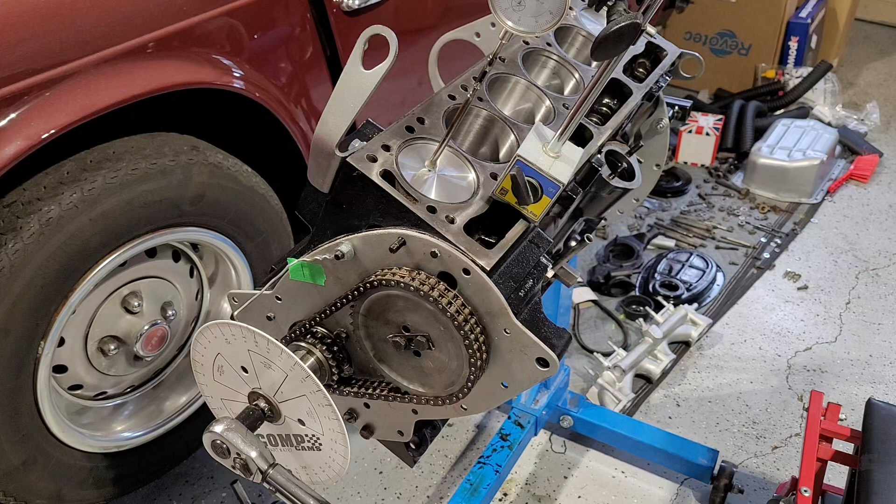Okay, welcome to part 2 of the true top dead center. So in this, what we're going to do is we're going to find a true top dead center. If you haven't watched part 1, I suggest you watch it, and I will explain why the system looks the way it is and the way I do it. So let's get cracking into what it is.

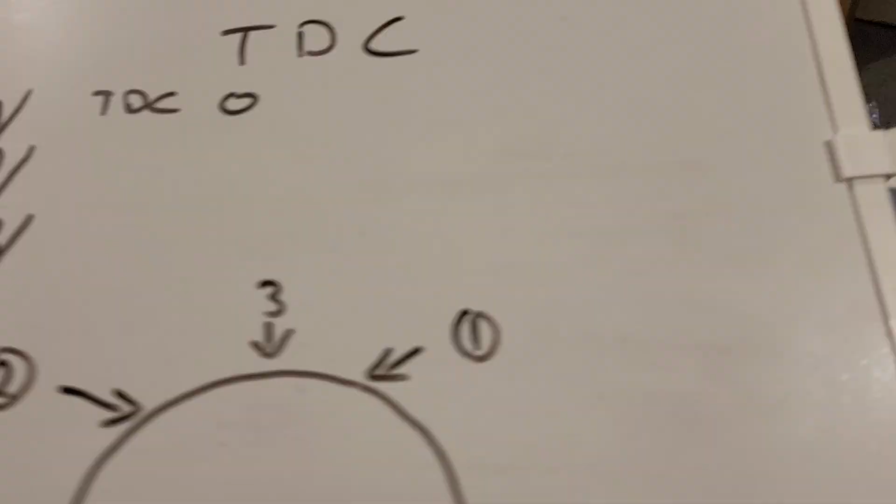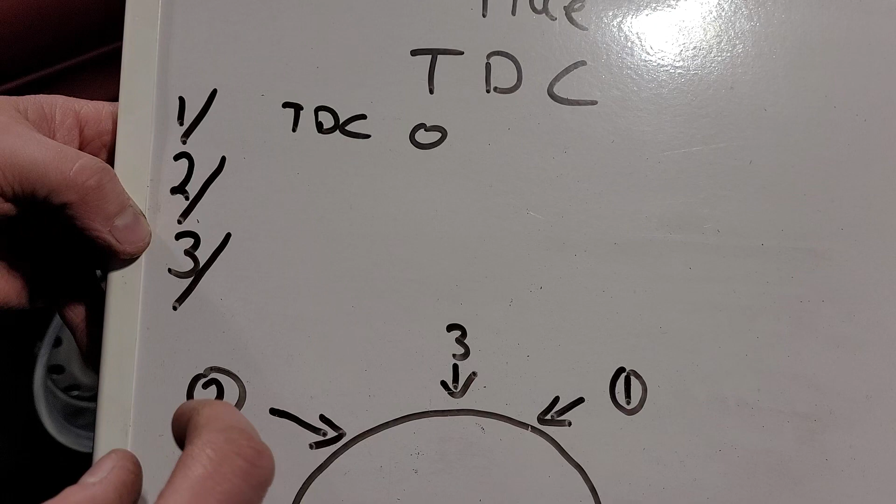So, true top dead center. Most people, they'll take their first reading, they'll write it in, they'll take the second one, they'll add it all together, divide it in half, and that's what gives them the true top dead center. Great. In this case, what I'm going to do is when I take my first reading, I'm going to set it at 0. I'm going to set that actually at top dead center.

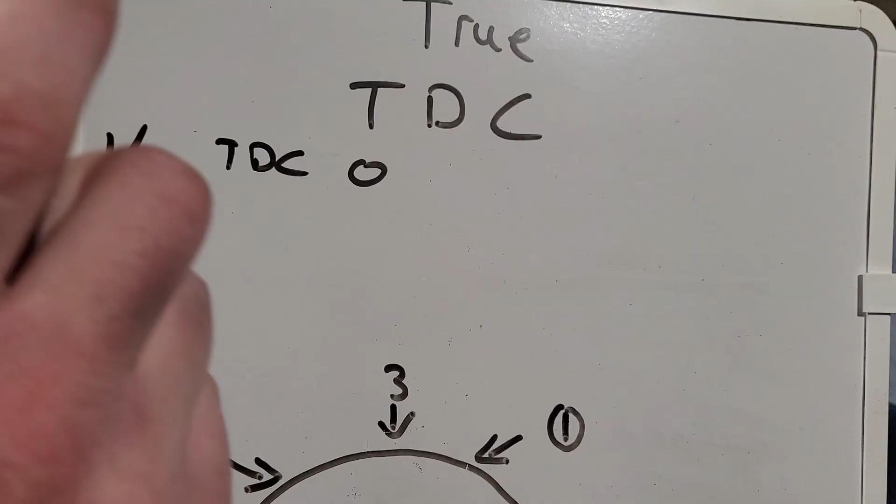That way, when I actually take the second reading, I don't have a big number to worry about. I don't have to worry about adding them together. I should have a small number that should be easy to divide in half, and that would give me the true top dead center. Well, that's the plan.

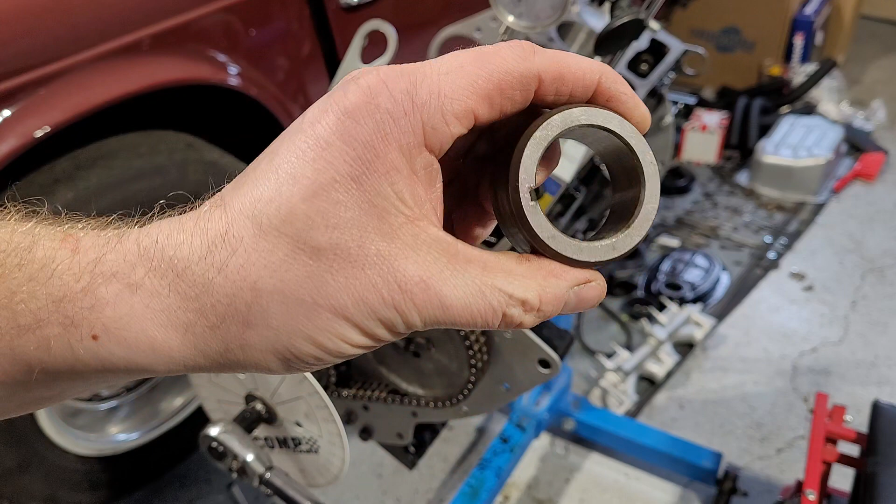Okay, so to do this video, what do I use? In this, I use a simple degree wheel. The only difference is I've used a collar. I've taken an extension for a 1/2 inch drive, and I simply cut it, used 2 washers in the degree wheel and welded it all together. I do have a shim that sticks in, so when I pull the shim out, it allows me to move the wheel, and then I put the shim back in and it holds it tight. So that's basically it. So let's go run some numbers.

As you can see, it's already up in here. You want it as close to the top as you can, but not right at the top. Run up and down a few times, make sure it's clean, make sure there's no assembly lube in there, that it's running smooth. I've already done that. So when it comes up and I start touching off it, I don't want it to go all the way around. I don't need it. I'm going to go roughly about halfway or something. Once I get to about halfway, I'm going to zero it out. So just pick a point. I want it.

Okay, so let me show you this. Again, the whole idea is to try to avoid this discrepancy. Right? So I'm going to say that's on 0. Or it's less than 0, that's for sure. It's so sensitive. Alright, camera back on.

Okay, now I've done that, I'm going to set my degree wheel to top dead center. If you've watched part 1, I've talked about having the line of sight. As you can see, I've put a bit of masking tape. I've simply got a pencil, drawn the line down, and I'm going to line it up with my pointer. That way, no matter what I do, it'll always end up the same. So I'm going to set this at TDC. Is it TDC? Nope. It's not the point though. I just wanted that. It makes it easier to read.

Okay, so just to make sure it's absolutely set on 0, I'm going to go back. I'm going to bring it back up, and this is just me testing it. I'm basically testing that when I get to 0, it stops at TDC. I just want to, before I go through the whole system, oh, I've gone too far. If you've gone too far, bring it down a fair bit and bring it up. I want to make sure this is right first, to make sure we end up with the right number. So before we move on, again, double check each step.

Oh, I've gone too far again. I don't want to be cutting this video. I want to show that this is how it's done, how I do it. That it doesn't work out perfect every single time.

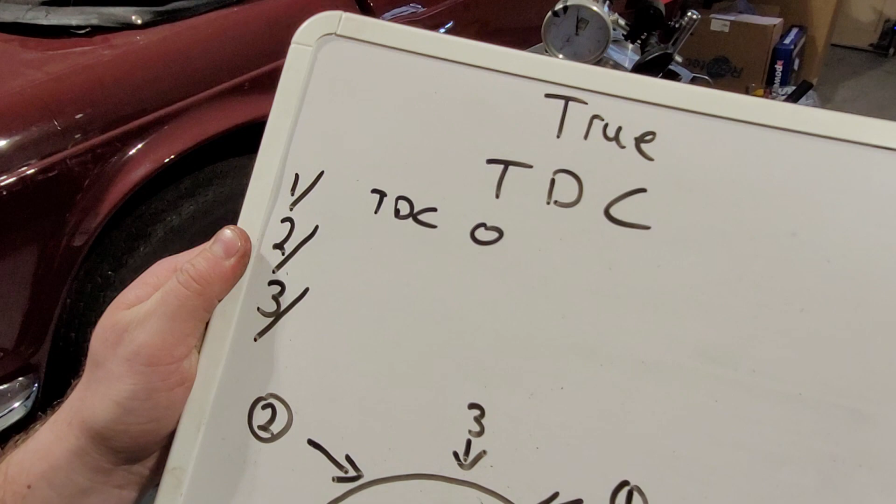And now I'm going to take the second reading. Obviously, it'd be nice to do it in one go. It's not always the case. I can guarantee you'll probably keep doing it a few times. It is what it is. And I'm going to do the exact same here. I'm not going to be cutting it to make it look like a cheat in any way, shape or form. So now I'm approaching it.

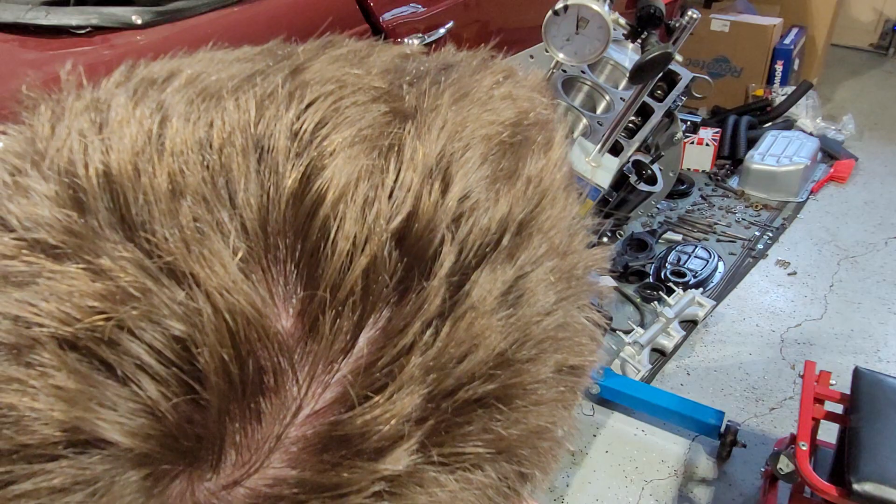So again, now I want to zero it out as best I can. Like I said, the longer bar you have, the easier it is, because I'm using a torque wrench. If you just have a normal breaker bar, it might be a little easier. It's up to you. At the end of the day, whatever you want to use.

Now, I'm going to say that's pretty much as good as the 0 as I can get. I'm going to show you again. All right. So, do you agree that's 0? I would. We're going to get you finer.

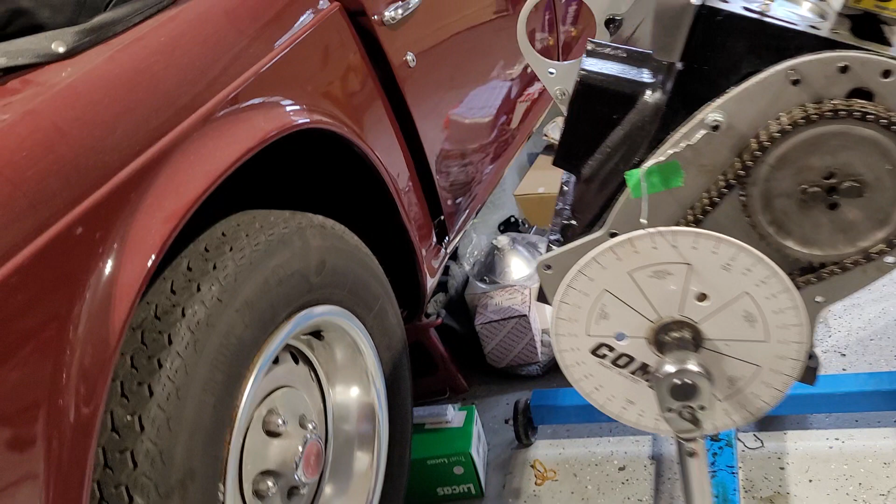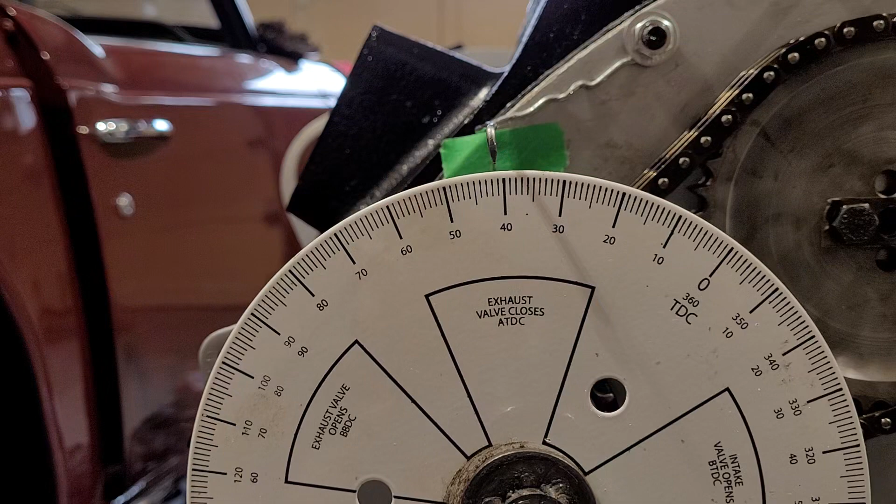Now, what we're going to do is actually, while I'm down here, we're going to look at what we are on. So, if you see where I've lined up the line of sight, you can see that we are on 40. Ooh, what are we? 41 degrees? The camera's moving, but it looks like 41 degrees. 41? How did you end up on 41? That's not right, you should be an even number.

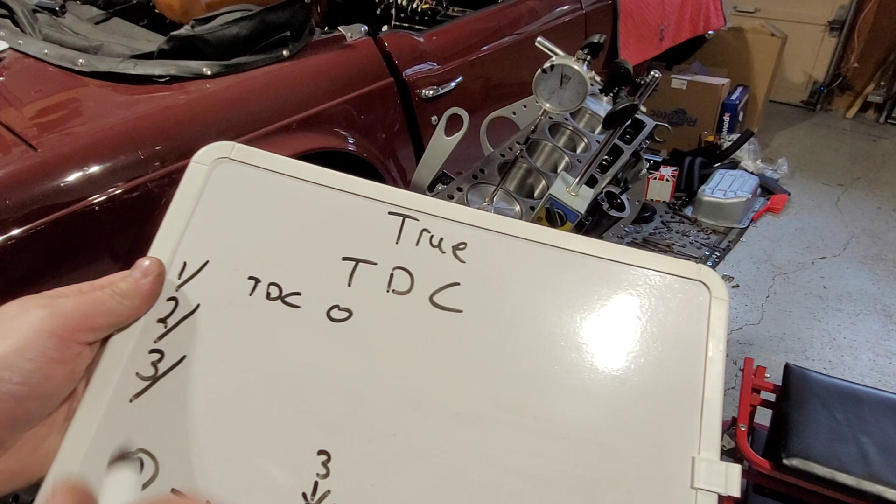So, check. Yeah, we are on 41 degrees. What's the chance of that? Half a degree. God, how do you get half a degree? So, if that's the case, and that's what it's coming up as, we're going to put 41 in. We're going to divide that as 20.5. This is going to be fun. Now, if this works out as bang on 20.5, it's going to be a first.

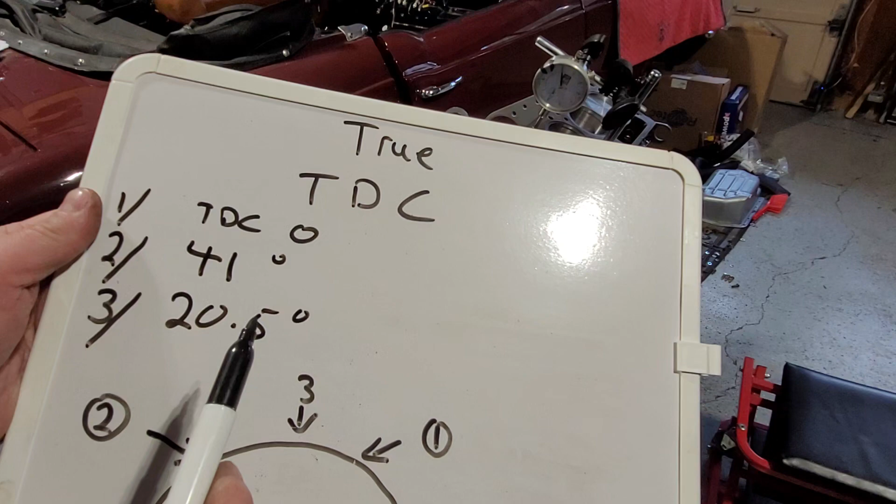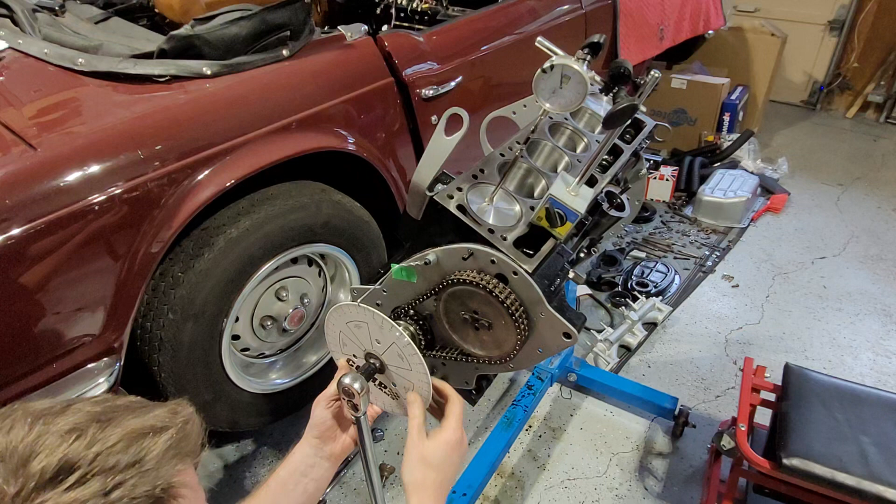Half a degree. God, how do you get half a degree? So, yeah, you're at 41. So, we want to be 20 and a half. So, this is going to be fun. I hope it's 20 and a half. I hope I've got my numbers right. Alright, 20 and a half.

Now, I don't know, something doesn't seem right because it's at 20 and a half, but I know it's zeroed out. I know it was, you see it was 41, so it should be 20 and a half. If not, for some reason it's not, we'll adjust to make sure it is even both sides. But let's see how this works out when I zero it out again. This is going to be fun.

I think the point is to find the exact same number. In this case, it's a half a degree. So let's hope I get exactly on the 0 again, because if it's not, I could change it. But that's the fun in trying to get this. Okay. That's it. There we go.

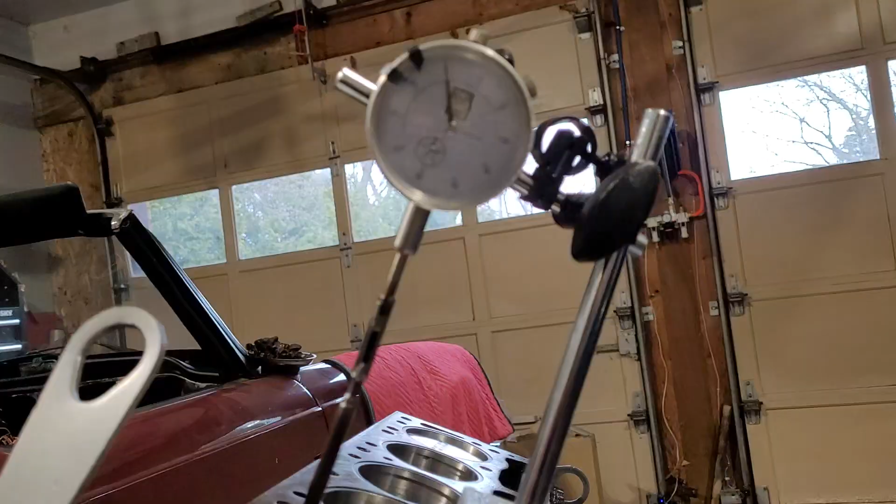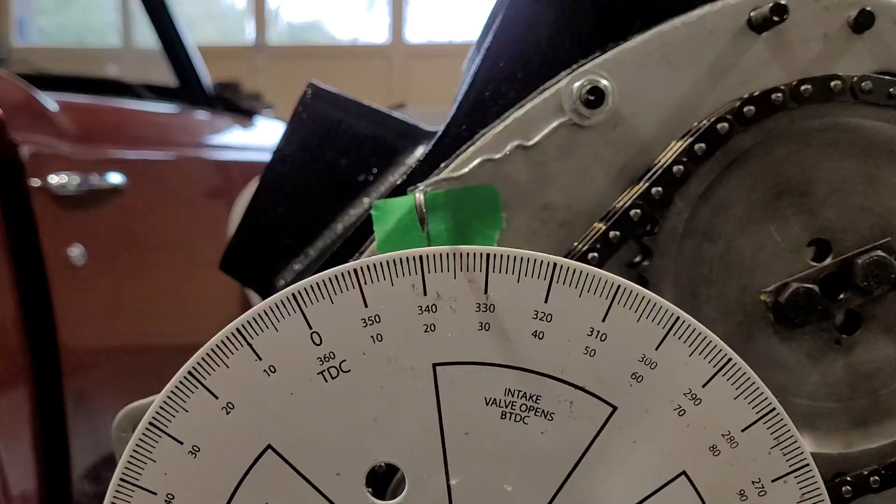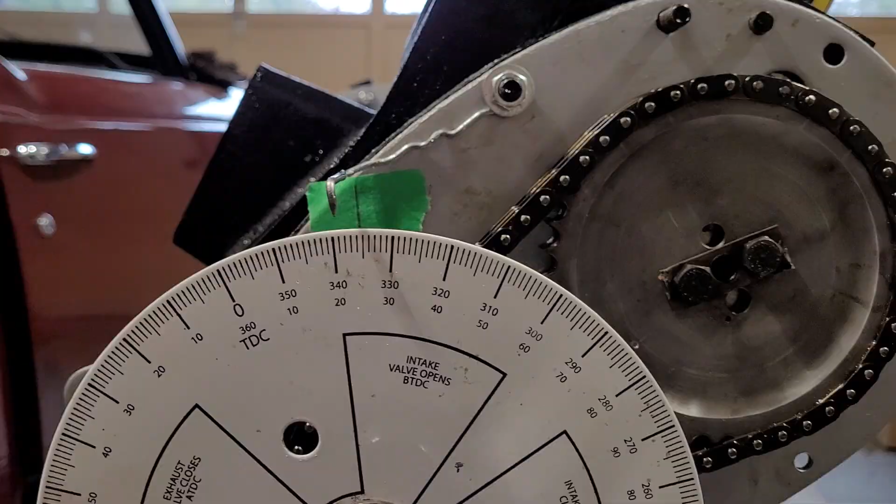Moment of truth. I'm going to zoom in and say that I am on 0. Would you agree? Probably. Here's the moment of truth. Am I 20 and a half degrees? Well, there's 20. Oh, look at that. I would say that's 20 and a half. Wow. 20 and a half degrees. A half a degree. Wow.

Now, just to make sure, I'm going to go back the opposite way. I'm going to zero it off again. But yeah, that is 20 and a half degrees. Wow. I'm going to go back again and zero it out. Going a bit too far. I'm getting all flustered because it was 20 and a half degrees. Half a degree. God.

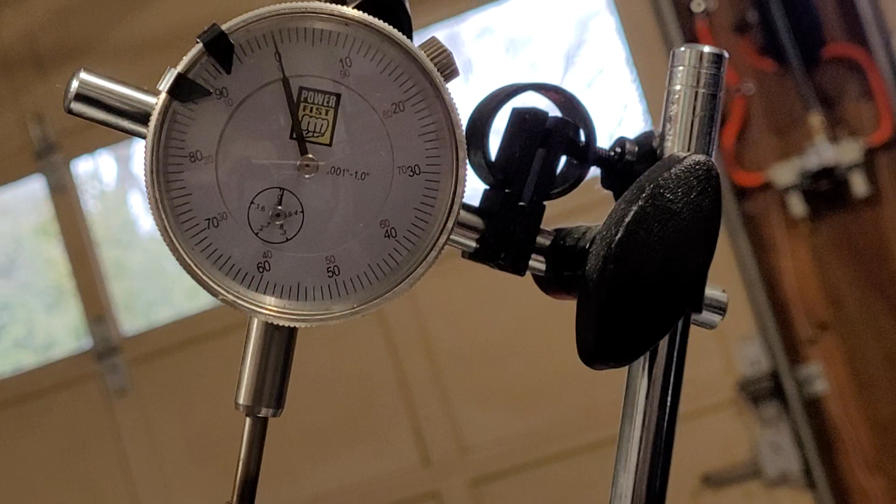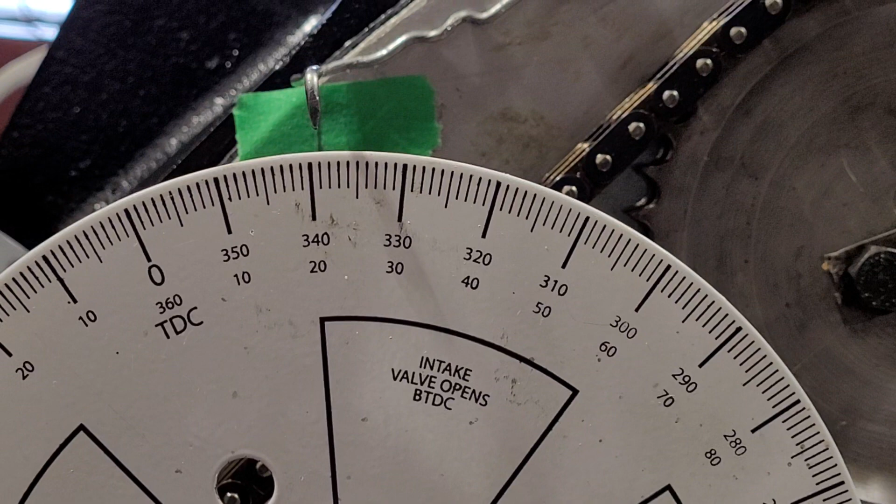Okay. Just to show you, I really want to try and prove this. And again, I hope I can hold this still. But there we are, zoomed in. I'm pretty sure that's on 0. Hopefully I can hold still. There's 20 degrees. It's 20 and a half. Because to me, there's 21 there. 21, you can see it doesn't line up with the point. To me, the point lines up at pretty much half a degree. So, there we go. Wow, 20 and a half degrees.

So that means we know the true top dead center is right in between. So I know when I line this up to bang on top dead center that that's it. So yeah, that's it. How about that? 20 and a half degrees. Wow, can't believe that. Sorry, how many times did I say wow?

Again, I'm not saying that this way is better than anybody else's way, but as you can see, I've managed to measure down to half a degree. So if you think you were 1 off, that's 1 degree off because obviously it's 2 sides. So that's the whole idea, I'm trying to eliminate the possibilities of any discrepancies. So in this case, that's about as accurate as I could ever get it. If you can find a more accurate way of getting it, please let me know and I'll do it.